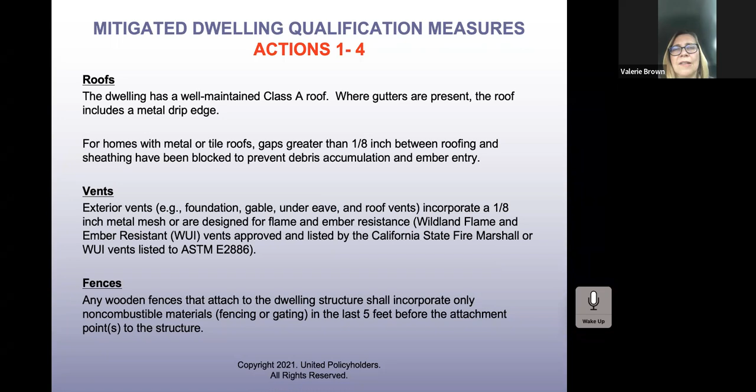Amy, if you can go to the next slide. And the next four actions: decks, again, no combustible materials beneath them. Any other structures attached, non-combustible materials. Any buildings less than 25 feet away from your dwelling or the decking needs to be rated for a 1 hour fire rating and include non-combustible cladding.

Windows are important. Either that dual pane glass, you want tempered glass, or they want to have a deployable metal shutter. That's important. The fire that impacted my community in 2007, people with aluminum windows, they just melted and fell in. So you want to make sure that you're putting in materials that are going to protect you.

And Carrie, if I can pick on you for just a second, when we were talking earlier you mentioned with roofs that the labor cost is the labor cost, and that drives most of the cost of putting on a roof. So when you're looking at a roof, putting on those thicker shingles, the 50-year rated roof versus a standard one, the cost is basically the same.

Yeah, basically, it's a very small amount because shingles are shingles, they're still putting the same number in. Metal roofs, depending on your budget, can run anywhere from a third more to 100% more, they can double your cost.

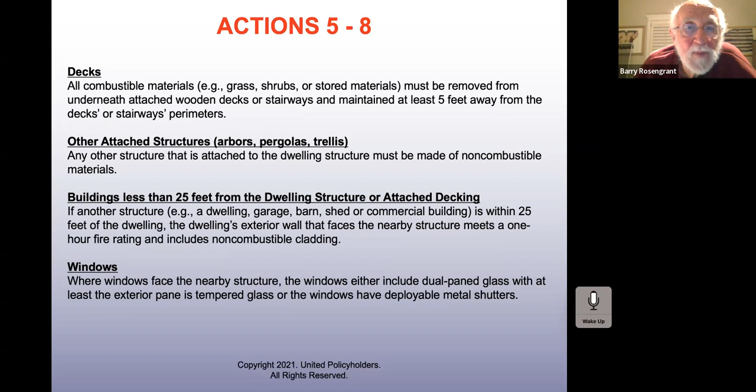But if you've got options, you could put a 50-year shingle on, do a metal roof, or do the terracotta. It really just depends on what your budget is, but being aware and maximizing as much as you can.

I would personally highly recommend what we do on our houses, especially the ones we're rebuilding that we own: going as energy efficient and Class A as we can for safety, and going cheaper on things like appliances, countertops, and carpet, which can always be upgraded later. It's just a good way to spend your money. If you have a choice of a metal roof versus $20 a yard carpet, you might want to go with something you can replace in 5 years that you can afford.

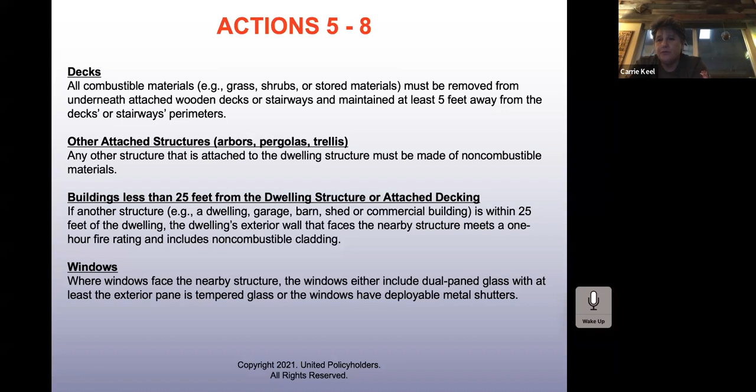This is just a quick slide, but it's very important because this is the wildland urban interface codes, all focused on protecting the envelope of the house you build so that flames do not come in, so that you keep your house standing. Next slide.

So as I was talking about roofs, these are some examples of those Class A roofs that are going to better protect your home: box eaves, the gutter guards, just keeping these things in mind.

And Barry and Carrie, as we're going through these slides, if you've got something you want to point out on these points, please don't hesitate.

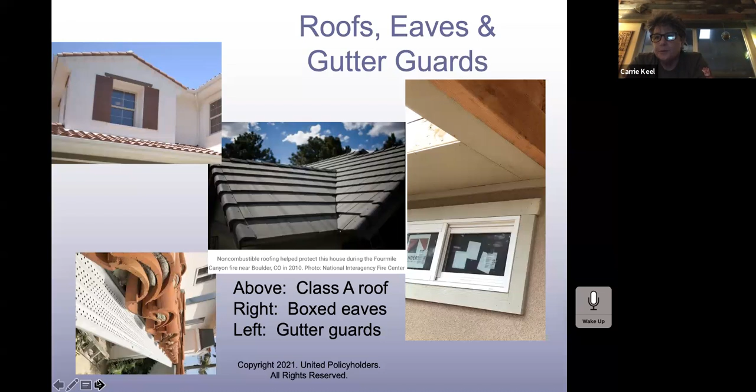Yeah, I will say one thing we're doing on our houses now is metal covering our fascias, and it slips up under the drip guard on the roofing. So your roof goes on, it kind of counter flashes, goes down and wraps the fascia either to your Hardie board or whatever, but that leaves zero wood exposed. Exactly, which is key.

All right, and then these are examples of the vents. Like I said, the WUI code calls out a certain diameter size, and these are 3 that the state of California recommends that basically exceed requirements. So they each have a different patented technology to protect you.

I know, Carrie, when you're building houses, instead of just doing the straight mesh, you're doing at least one of these brands, right? Yeah, we're doing the ones that actually melt and make a solid barrier so that no embers can come into the house. When it reaches a certain ambient temperature, it becomes just like a solid piece.

And you can retrofit those too. Supplies have been so weird, you just get how many you need and order them from whoever has them that meet local and state building code. Right, right, because you want to meet or exceed.

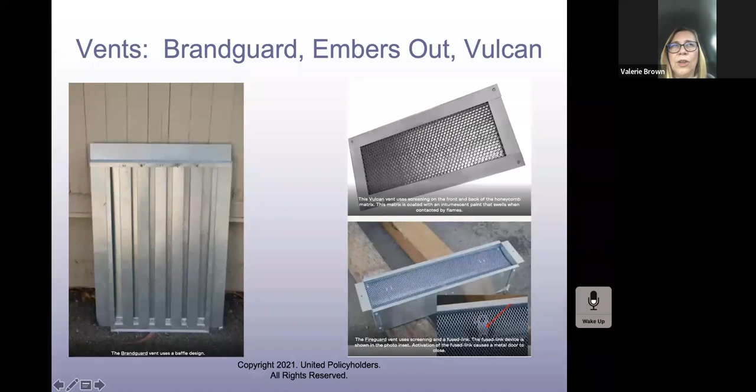Yes, all right, next slide. And Carrie, this is actually a house you're building, so I'll let you talk about this technology.

Yeah, this house here is a structural insulated panel. It's built on a standard foundation, the foundation is insulated as well as concrete, so you've got insulation on both sides. The panels are set, they're 8 by 24 foot, and then it's stuccoed on the outside.

They basically have very low cost per square footage. We stick built the roof on this, you can also do the panels on the roof, but basically you've got like 70% less to heat and cool a house like this. And it's all Class A. The windows are all double pane, low E, and tempered — anything that's low. Class A roof, Class A on the siding.

And we're coming in at about — the company that actually provides the panels for us, they're doing turnkey for about $190 a square foot, which is pretty low. So anyway, that kind of addresses the Title 24 as well as the WUI, kind of encompassing all that together. Been a fun process. It's really good.

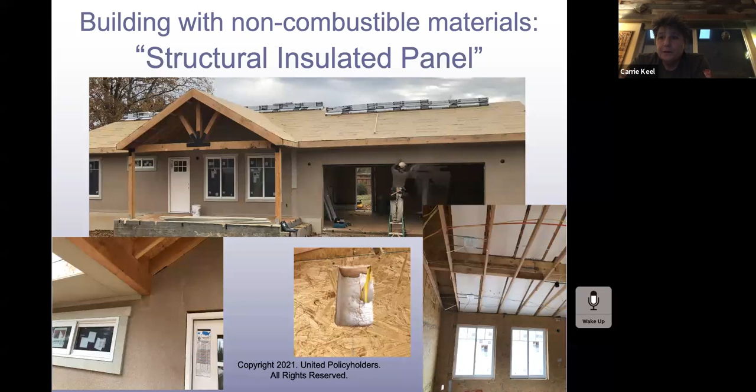Totally. Yeah, our next slide is, you know, these are materials. So there's autoclaved aerated concrete. This is an example of that. Carrie, I think you've seen this house in Paradise, correct? Yeah, I've seen several houses of that style being put together. I'm not super familiar with them, and a lot of the companies are also using the insulated concrete foundation.

But what I don't get about those is they're doing a standard stick-built roof. And if you're doing a standard stick-built roof, then you go back to what Barry was talking about - you get something on the roof, it's going to burn through. So you're going to have your walls, but you're not going to have your roof system. I mean, it's a lot of money to do poured concrete walls. The houses turn out super nice, but without doing that roof in a totally non-combustible surface, they kind of don't make a heck of a lot of sense to me personally.

But the other thing we noticed here is the houses with the steeper roof pitches did better also, because the steeper the roof pitch, things like small branches, if there were gutter guards, it actually rolled off the roof. So pretty much hardly anyone builds less than 6 and 12 here because of our snow load. But the houses with 6 and 12 and up that did have gutter guards, there was a lot of debris around the perimeters that just shed off.

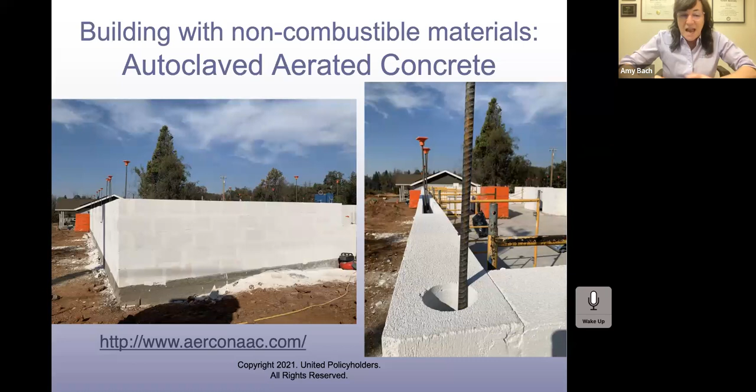So a lot of the challenge for folks is just explaining that it's apples to apples in terms of cost, if you can. That may not always be possible.

Or what you said earlier, Amy, going for trying to get the settlement on what was, and getting that agreement. And then once you've got it, you're contracting and building. Because that's always your first hit.

They shouldn't care what you do, as long as you spend up until. This process involves your insurer cutting you a big check, and then you put it into an escrow account with a bank, or you have a mortgage and the mortgage company has an escrow account.

You've got to establish progress milestones in order to get your insurer to pay more, or for the money to get released. Again, you're going to have to be able to be your own advocate to say, yeah, we're doing this innovative approach, but it's still apples to apples.

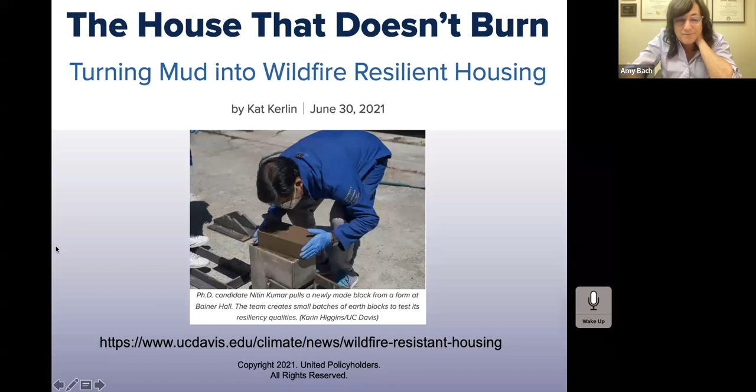So, building with non-combustible materials. And ICF, there should have been a slide for that. My apologies, I think that's on the other deck. So that would be one of these technologies here.

The Tridipanel is a modular system that you put together and blow concrete onto. Bone is a Canadian-based home builder using technologies similar to what Barry's company is doing, looking for a prefabricated metal building with other components to make it work. And Durisol is just a wall material that's flame resistant.

So if Barry and Carrie wanted to talk about ICF, I think it's definitely worth talking about. I think there are 30 houses in Paradise rebuilding with it right now. And the SIPs use ICF too, because the 4-foot basement is also what gives you your energy efficiency—it's really cool.

It comes in blocks, it's modular. When you stack your foam blocks, it's already got the racks for the rebar. It really cuts time down—you clip your rebar in, you fill it up, and the foam is your form. You can either build standard construction on top of it, do SIP, or continue going all the way up with it. It's pretty neat, labor saving, energy efficient, and you don't have all the waste or the form boards. It really changes things—it addresses construction waste, Title 24, and fire resistance, because then it gets stuccoed or hardy board or stone over it.

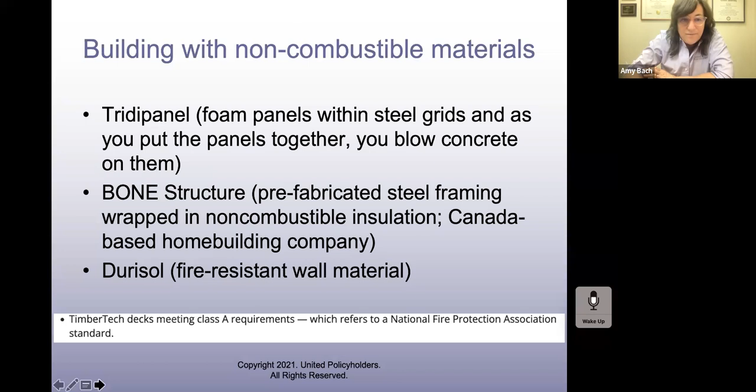Okay, all righty. And it doesn't burn. It melts, but it doesn't burn. Yeah, exactly. Right, okay.

Before we get, actually, have we covered materials? Is there anything else, Barry, Carrie, or Val, on materials that we want to hit? I don't think so. Okay, great.

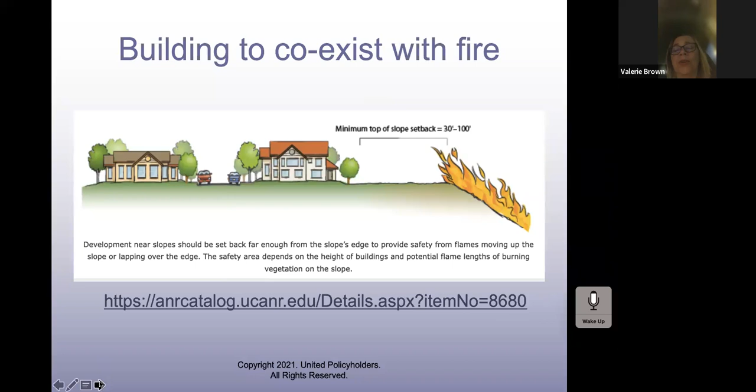Going back to the mitigations we were talking about earlier: defensible space in your landscaping, as Carrie was mentioning, using metal cladding, that non-combustible material, having at least 6 inches between the ground and the exterior siding of the dwelling, so you don't have a place where embers can catch or flames can reach.

That 5 feet around the dwelling and attached decks should have no combustible materials. For the landscape, 5 to 30 feet, again looking at connectivity of vegetation, making sure your trees are limbed so you don't have fuel ladders that can spread from the outlying part of your property to your house.

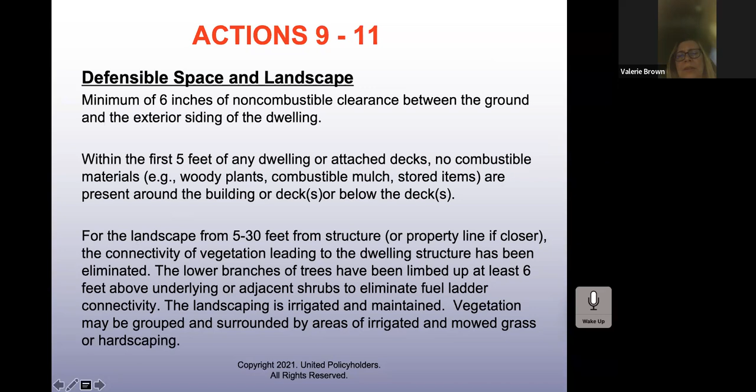I think the next slide might have an example of that. Oh sorry, never mind, that's the slide after this. So let's get through actions 12 and 13.

The next zone is that 30 feet to 100 feet from the structure. Again, it's just breaking your fuel ladders and creating gaps so you don't have a hedge that runs all the way to the house. And then being aware of your slope, because when flames are coming up a slope, it's increasing your risk exponentially with those steep slopes. You want to be careful with that.

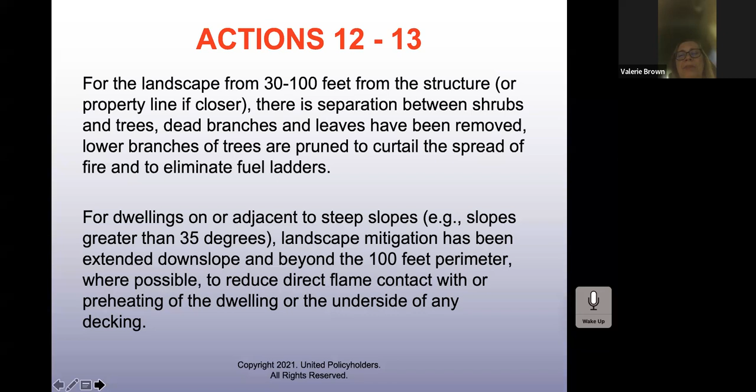And I believe the next slide shows some examples. I keep saying it does, but it doesn't, sorry. These are the wildland urban interface codes focused specifically on your landscaping and hardening of your property. And then hopefully the next slide is the example.

There we go. So here's your example of the 0 to 5 feet from the structure. It's going to make or break. As you can see in this presentation that Amy was on, reducing that vegetation in the 0 to 5 feet zone nearly doubles the property's wildfire survival rate.

I know we like to have plants and vegetation around, but make those pockets of vegetation further away from your house. Don't have your shrub growing right up to your eaves, or those two cedars on either side of your garage that grow and touch your roof—I call them candle wicks. You've basically created a wick that's going to take direct flames onto your house.

The guy in the picture is Roy Wright, currently the head of what we referred to earlier, IBHS, the Institute for Business and Home Safety, that puts these standards out. He used to run the National Flood Insurance Program. His family has, or had, a house in Paradise.

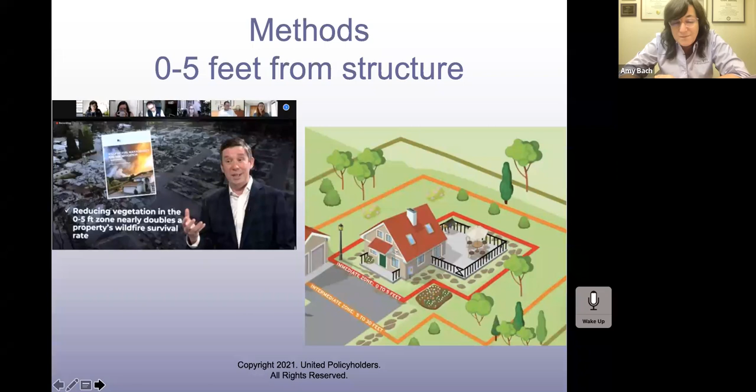But we think it's possible that IBHS is going to say you have to have non-combustible siding in order for your house to be classified as a wildfire prepared home. So I'm here to say that if you're thinking about doing that groovy horizontal wood thing that a lot of homes have, chances are that's going to knock you out of qualifying as a wildfire prepared home. I just felt like I needed to throw that in there, because I'm worried that they're going to come out with that.

So back to the methods here. This is a great illustration. This is exactly what we're talking about. I think this was the Tubbs fire, and this is a home that survived because of what they did from the 5 to 30 feet zone. You can see it burned around. They had a slope there, but because there was no vegetation to catch and carry it to the house, the home site was actually protected. I think the next slide will show the 30 to 100 feet zone.

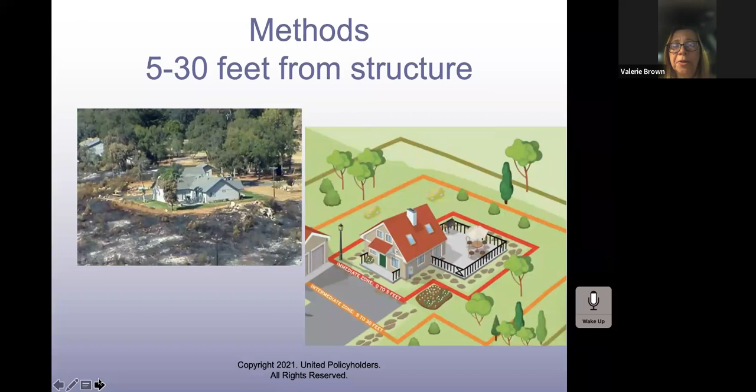We have this vision of what we want our home to look like, and that includes the landscaping and all of that. But if you're going to put all that effort into making the envelope of the house as wildfire prepared as possible, please take that next step and look at the home site and how you can make all of that work to protect that investment you're making as you rebuild.

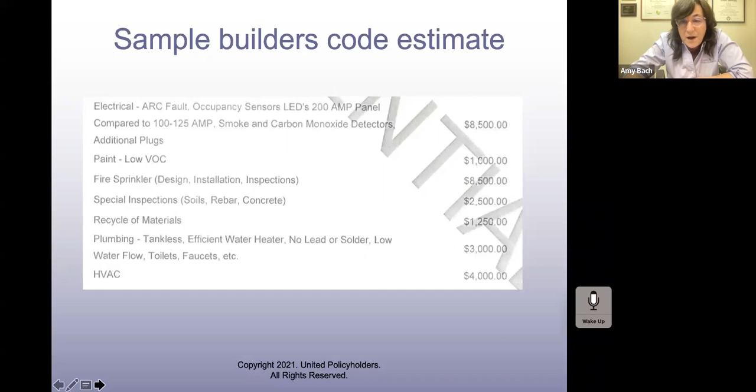This is an example from our website of how you can break out the increased costs due to compliance with local building codes. These are samples you'll find on our website in our samples section, uphelp.org/samples. A lot of the time you've got to do some homework.

Sometimes your builder can help you, and in general, Carrie, Barry, we usually tell people your builder should be familiar with the codes in the area and should be able to tell you. But is there anything you'd add to that advice, Barry or Carrie?

The problem is, I think it's partially a scheme for full employment, the process of getting a permit drags on and on and on. And if you want to shorten that, simplify and come prepared. They don't have PhDs at the desk.

So Carrie and Barry, is it reasonable to expect your builder to be able to help you document code upgrades, or do you think that's above them? Yeah, to an extent, depending on how much.

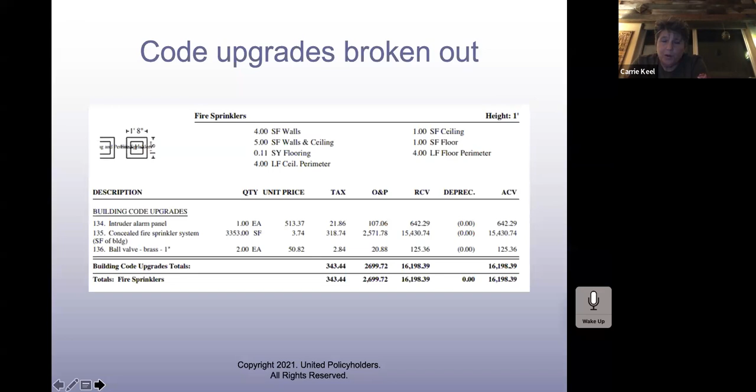And I know Paradise went full out because of the amount of loss, but once you submit plans, we're getting them back in a week to 10 days to permit. That's because you've developed trust. No, everybody - it's just because of what went on here. They've hired so many people, they're ripping them through.

But when I was in Sonoma County, it could take 6 months to get a set of plans. Yep.

So most jurisdictions, it's not too hard to do the research and find out - most jurisdictions where there's been a wildfire will typically, within a couple months of the fire, have the local building department publish some kind of list of common code upgrades. That's something Sonoma did. It doesn't always happen, but in Colorado, I know in Boulder they do.

And so this kind of brings us to the end of the substance, and just a reminder back to the whole insurance process.

Years ago, before all these wonderful advances in knowledge of what you can incorporate into a construction project with an eye toward resiliency, people were looking more at rebuilding green, and we had a whole program where we would walk people through if you want to rebuild a LEED certified house. I think these days people are much more focused on cost containment, cost efficiency, and building with an eye toward risk reduction. But it was very similar in the approach people take when they want to rebuild green, very similar to the approach of when you want to rebuild a wildfire prepared home.